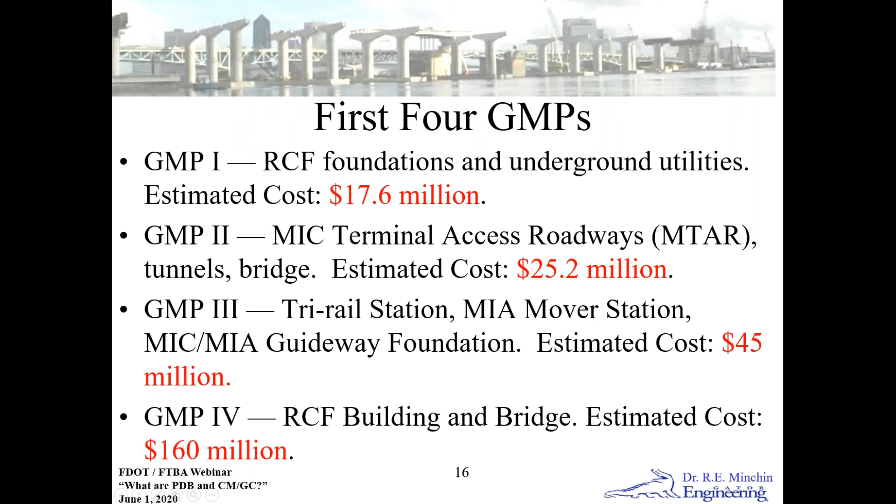And you can look here at these values of these GMPs, and you can note quickly that the first 3 are kind of small compared to the 4th one, and of course they get bigger after that. And we'll get back to that. The next slide. I identified 12 problems with this project, and I'm going to go through each one of them very quickly, given the time. But we have 12 problems. Next slide.

The first one was a decision, and it was the decision for an inexperienced owner, and I do mean inexperienced with CMGC, taking on the largest project in history. So instead of doing the pilot program like we did in the 1990s that I was a part of when I worked with DOT, that we did for design build, to get our feet wet and learn what we were doing, we jumped in and did the biggest project in history for our first project. And I mean, what could go wrong, right? So we made that big mistake and got off on the wrong foot there.

Problem number 2 was GMPs number 1, 2, and 3 were small, as you saw. I pointed those out. The reason that was a problem was that the DOT had made a big deal out of this project, which it was. It is a huge deal, was a huge deal, and was going to bring an incredible boost to the economy in South Florida. Just building the thing, plus all the benefits of having it once it's completed. But they made a big deal out of it in the press and everything.

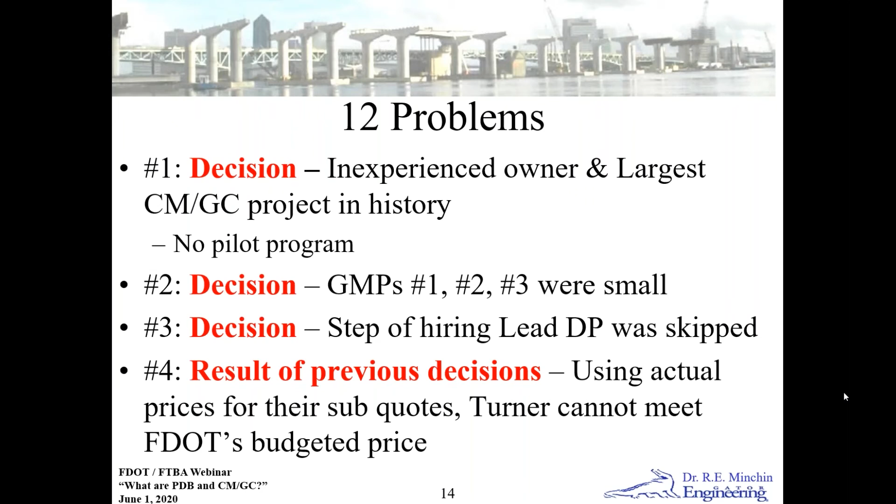The fifth problem was force majeure. It was not anybody's fault that had anything to do with the project. I wouldn't call it an act of God, but we had 9/11. The World Trade Center attacks destroyed the financial model for the project, because the Miami International Airport was a partner in this project, and suddenly they had no income. So it screwed up the financial model.

It also stopped the CM and design professional selection process. I went back and forth about whether one should be problem 4 and 5 and the other should be 5 and 4, but these worked together. 9/11 happened in there, and that's why the design got finished.

And then we look at problem number 6. The geotechnical engineer just kept designing, and so by the time you went to get your CM and get a GMP settled on and agreed to, you had a mess, because 9/11 had happened. The geotech had continued to design, the design was finished, and the CM had no input to the design, and they had no wiggle room, so they just couldn't meet the cost.

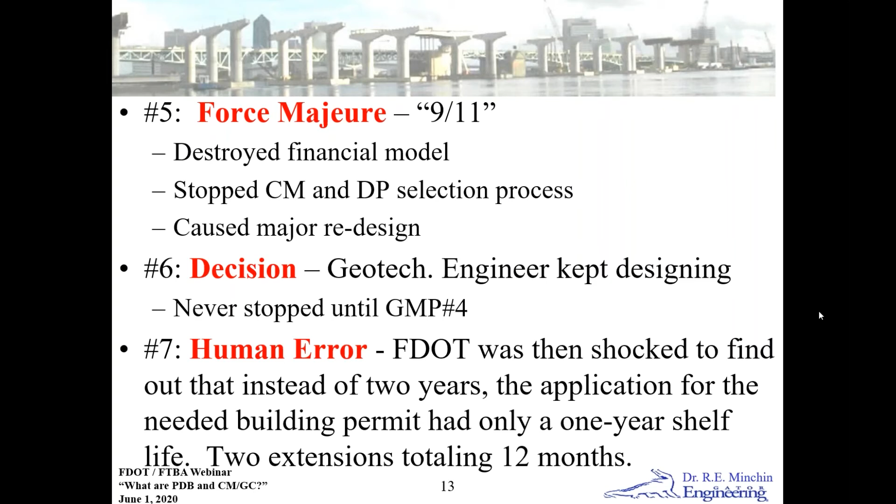And also about the same time, the county was coming along with their new building code, and FDOT was then faced with a tough decision whether to start construction immediately or restart the permit process under the new code. And the decision was made to commence construction, which was a mistake. It would have cost them $200,000 to redesign under the new code.

They went ahead, and we've documented the cost that they faced, not to mention the heartache of going ahead. It ended up costing them 10 times the $200,000 it would have cost them to do the design, by going ahead and starting the construction.

Problem number 9 was that FDOT held firm on their budget, even though Turner showed them the actual cost and showed them real costs here, like Ken said. But the DOT wouldn't budge. And Turner, you told me, went ahead and basically took GMP 1. They agreed to it because they had $1.35 billion ahead of them.

They didn't want to blow it on the 17.6 million. So they went ahead and took GMP number 1 at cost to keep things moving.

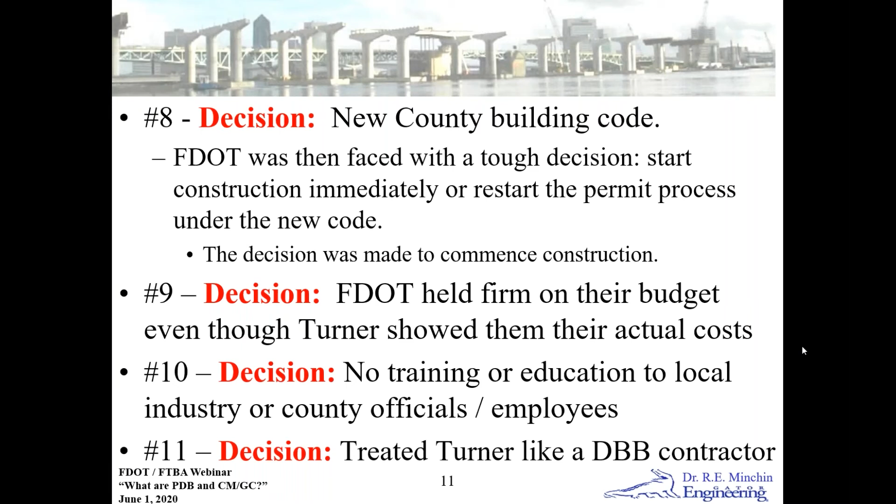Problem number 12 was the coup de grace, the last one. This was their biggest mistake, and it led to a change in the way they did things. GMPs 5 through 8 went great, and you ended up with a fine product. But in these first 3 GMPs, it was 2 instant replays of GMP 1. Basically, Turner's taking them at cost. They're thinking things are going to get better, but the design keeps going, and it keeps staying ahead of construction. So you got the same problem over and over again.

And finally, on GMP 4, it's just more money. It's 160 million, 162 million, whatever it was, and Turner just can't eat it, so they just can't get together. So there's an impasse. They couldn't agree. FDOT relet GMP number 4, as Kat said you can do with progressive design build. They exercised that option and relet it as a lump sum design-bid-build project. Turner was allowed to bid on it because Turner had nothing to do with the design, so you don't have the problem you have with progressive design build there.

Turner was allowed to rebid as one of the 3 bidders on the project, and they bid $370 million, and they were the low bidder. Remember, the engineer's estimate was 160. So it was exactly twice their original offer that was rejected, and they were the low bidder. Well, what happened? You might remember the worldwide steel shortage. China had bought all the steel in the world. The price of steel shot through the roof.

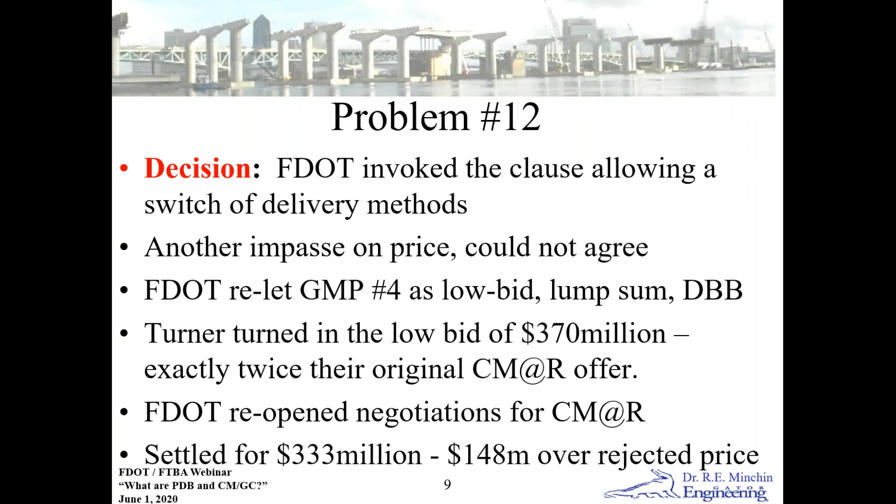And this happened between the time that the DOT finally rejected Turner's last offer of 185 million and the several months later that it took to relet it as a design-bid-build job. And it did take a year before they realized, gosh, we got to reopen negotiation with Turner for the CM at risk. So Turner knocked 10% off and settled for 333 million, which was 148 million over the price that the DOT had rejected earlier. Okay, new slide.

Ken? Okay. So this one is like I told you, my grandfather helped me. You know, we've had a lot of case studies, and Dr. Minchin mentioned Greg Hostert and I were fortunate enough to work on his research team for 2 years, and we had about 5 years worth of case studies, and that's great. But it's hard to go to your leadership and sell case studies, right? Because that's just based on our experience.

Well, now by the grace of God, literally we have data. So when we started 10 years ago, we had no data. We just had case studies, which was very tough to sell to your leadership. Now, based on Dr. Molenaar's research from University of Colorado Boulder, and based on Dr. Minchin's research from University of Florida, we have data, which is huge. So Deming always said, in God we trust, all others bring data. So next slide.

This is just a brag sheet for Ken. When he was doing all this work for CMGC, he caught people's attention. Engineering News Record named him one of the top 25 newsmakers of 2009. They call it the miracle of Osceola, the Osceola County miracle for what he did. And we'd love to spend time telling you all about that, but we just don't have time. But he got a lot of good publicity about that. And Ken is a guru when it comes to CMGC.

Next slide. Thank you, Dr. Minchin. You know, teaching in front of Dr. Minchin, I always say, to quote him, is like talking about the flood in front of Noah. So he's very, very gracious, but he's the one that actually brought us in. And in reality, it was a team's effort. But it shows you the power of a team, and with this method, this is the only method where you can build your own team. And I have to say, Greg Hostert was deputy director, Jason Bolonois was the head of construction. So it took a team, and we even used Turner, which was one of our best CMs. So it really does show the power of a team.

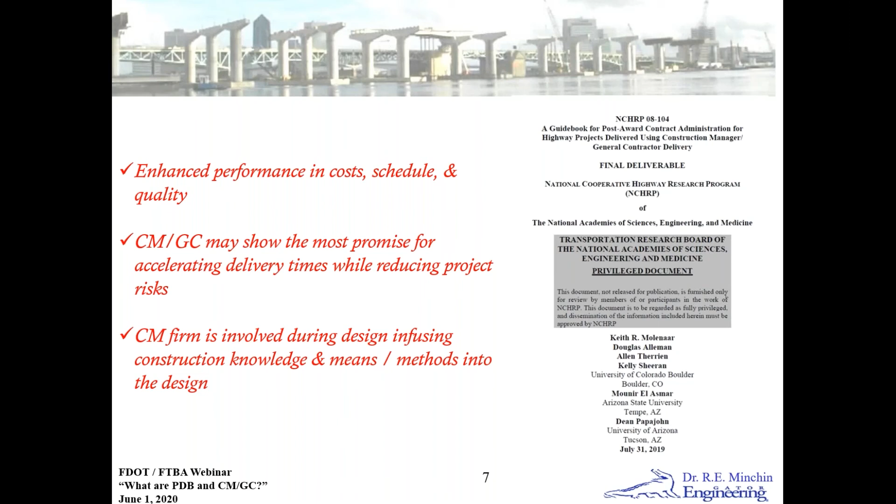This is a slide by Dr. Molenaar, and what it says is really critical to look at is construction cost growth. So if you look at CMGC, you'll notice that the other methods have 4 times the cost growth, which is significant. Remember, we talked about knowing your weapon systems as a leader. We have to understand what this thing is capable of doing, and what it's capable of doing is having the other methods have 4 times the cost growth. So we actually call this a zero change order method.

And really, it shows 0.9%, but in my opinion, the one thing CMGC is really good at is building more scope for the job. So unfortunately, when we built more scope, we got that dollar amount charged against us. So I would say that your cost growth is even less than the 0.9%. It's closer to 0 because we build the most work with this method. But unfortunately, when we added extra work based on saving money, they calculated those savings against us. So you can see the tremendous difference.

And like Deming said, a bad system will beat a good man every time. So if you change the system, the problems will drop out, which is what you see on this graph. So next slide.

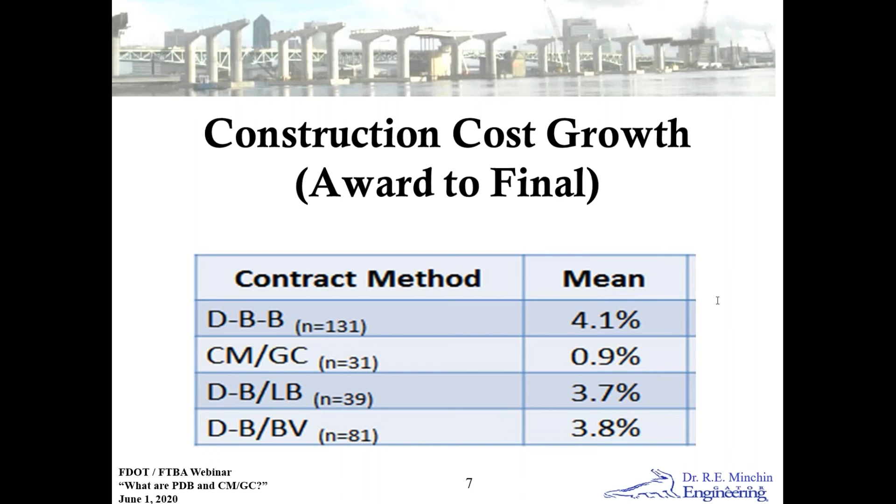Now, one of the things that Dr. Minchin came out with, you always have a PhD statement in one of these. They used to tell you, if you want speed, do not use CMGC. That could not be further from the truth. CMGC can accomplish speed, but it actually gives you the most scope for your job. So not only is it the fastest or one of the fastest methods out there,

because we do not have a handoff between the original designer and the design package. There is no handoff. And usually what we say is when you hand off a design build, you can lose up to 30% efficiency. So the reason we can be faster is we stick with the original designer and we never change. So you never have a handoff, and you save the loss of efficiency. So next slide.

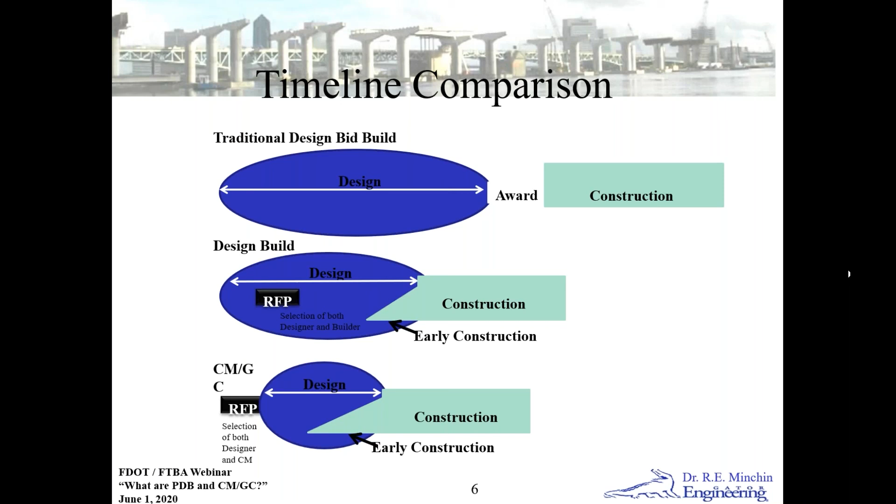And you had it there, and I think we missed it for a second. Yeah. Go forward one more. There we go.

Okay, this is my favorite slide, and Greg would say I could spend an hour on this slide because this is based on the data that Dr. Molenaar came out with. So forget mean costs. That's just the average price of the job, just a sample size. It has nothing to do with what we're talking about. But if you look at mean project duration, that's your design, your construction, your permitting. If you try to add them across, they're not going to add because there are variables in there. I know us engineers like to add across, and it's not going to add together.

And another thing, if you look at design, the average is 904, we're at 281. So why are we so fast? There are many reasons, but one reason is if at all possible, we bring the CM in at the same time as the designer, and we bring the ICE in at the same time, and we design very efficiently. So we're not designing bid sets. The average time in America between 90% plans and breaking ground using low bid is 1 year. We don't have to have bid sets in this method because we're not bidding the job, we're getting pricing as we go. So off the bat, we automatically save 1 year.

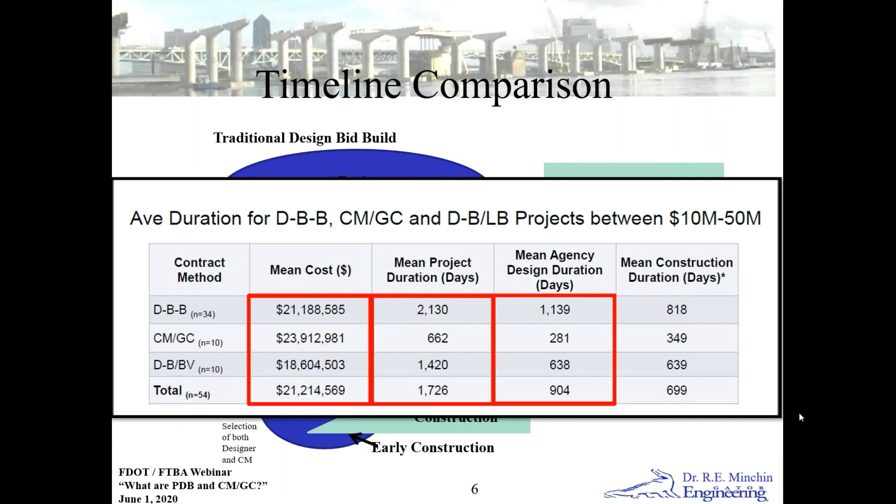Okay, and advance one more.

Thank you. Okay, so this is the percent of projects with major delays. So if you look at CMGC, it's half of design build and it's half of low bid. And really it's less because, like we said, in our opinion, based on University of Florida's research, with CMGC you get more scope for your money. It provides the best value to the owner of any method that we have.

As we were adding scope, we obviously have to add time. So as we save money and we're able to build more scope, they counted that time against us. So I would say that it's actually less than what it shows on here, but even so, you're looking at half of the delays using CMGC versus other methods. Next slide.

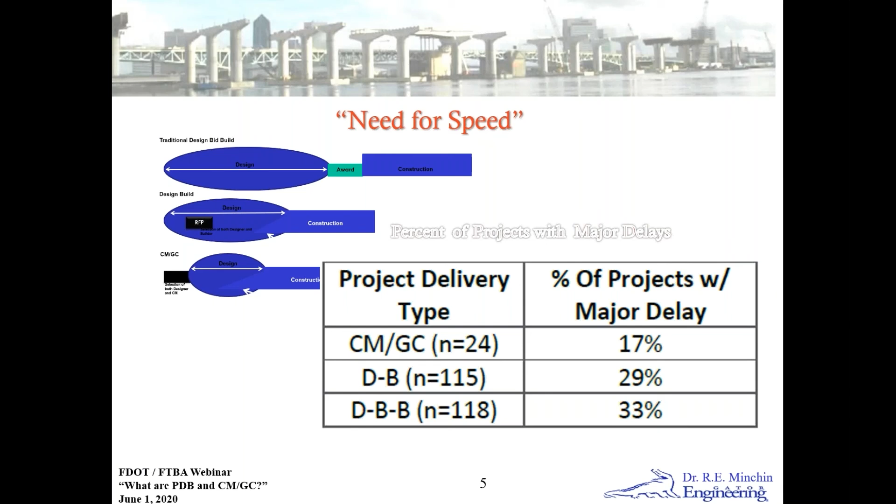Well, this is an interesting slide. I think, Ken, you talked about how two research projects that happened 10 years apart ended up with pretty much the same graph. And we're running short on time, so it just shows the amount of total risk goes down if you do it right. Ken, you want to comment on that?

Yeah, I would add, 10 years ago when we did our research with Dr. Minchin, we created this graph, and this was based on case studies. And we believe that CMGC actually reduced the risk more than any other method. The reason it reduces the risk more than any other method is in low bid, obviously the owner takes the majority of the risk because we prescribe exactly how we want it done in plans and specs.

In design build, we push the risk over to the design build team because we say you have to build it for a price, traditionally low bid price, right? And you have to do it for a schedule. So we're pushing the risk over to the design builder, which costs us two things. It costs us time and money. Whereas CMGC, we're mitigating those risks as a team. We're not allocating them, we're not transferring them, we're trying to get rid of them.

So by far, the most powerful thing about CMGC, second to innovation, is it does the best job actually getting rid of these risks. So 10 years ago, we drew this graph based on our case study. And literally by the grace of God, Molenaar came out with the same graph based on data, which we were thrilled because I was afraid to look at the graph, right? I thought, oh my God, what's going to come out? Well, he came out with the exact same graph, which shows the data backed up everything that we thought in the case studies. So thanks, Dr. Minchin. Next slide.

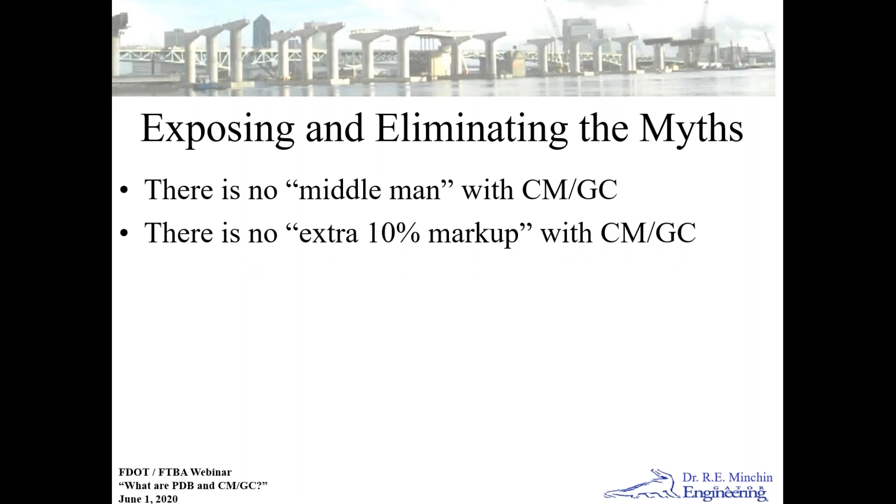We would like to expose and eliminate some myths next. There's no middleman with CMGC. Next. There's no extra 10% markup with CMGC. Next. The myth came from some CM at risk projects 20 years ago that prevented the CM from self-performance. Next. CMGC was developed to do away with this, and CMGC requires self-performance by the CM, so there is no middleman.

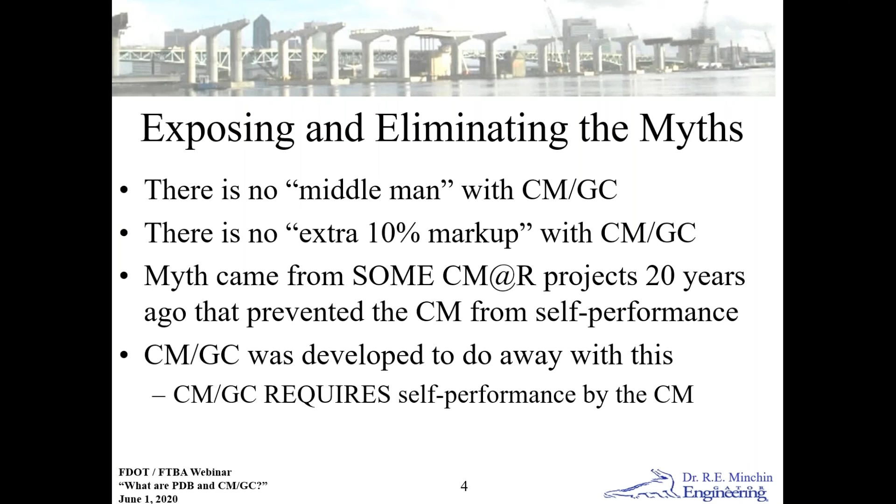Hey, Dr. Minchin and Ken, we gotta hurry up, so we're getting close.

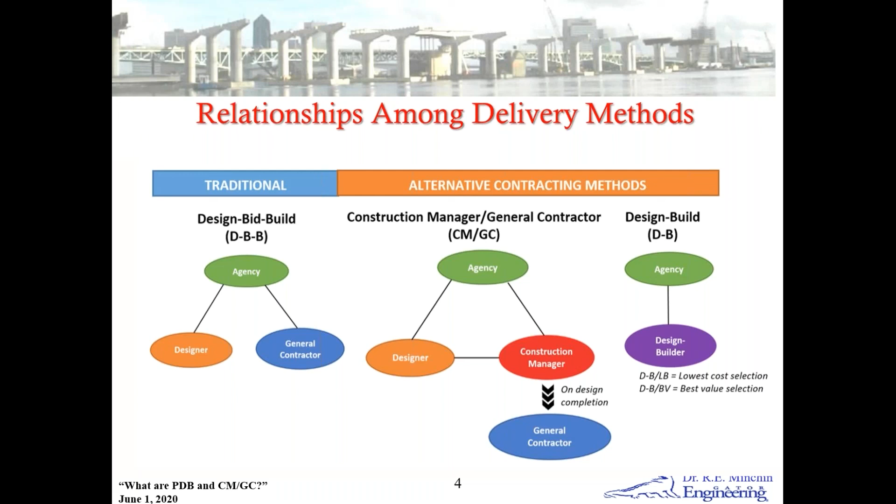Understand. Look at the difference. Look at these comparisons of these org charts, and you'll see that the design bid build and the CMGC are identical, except there's a line between the designer and the contractor, the CM, where there is no contractual relationship. It's just that they work together. Okay, so really, if you're used to design bid build, CMGC is closer to what you're used to than design build. Next.

Love to go through this, don't have time. The two most important ones are the innovation and the reduction and allocation and reallocation of risk.

Ken talked about that already. Constructability, I'm doing a research project on that right now. That's really important too. Love to talk to you about it, but don't have time. Next.

Had the Mountain View Corridor next. Utah DOT job, 15 miles. This is what Ken talked about, the scope increasing, and they charge you with more time and more money in the statistics. But it was a 15-mile project. Ended up being a 17.5-mile project because they saved so much money by innovations and risk allocating and reallocating and reducing the risk that they were able to buy 2.5 miles more of real estate for right of way and pay the contractor to build 2.5 miles of construction.

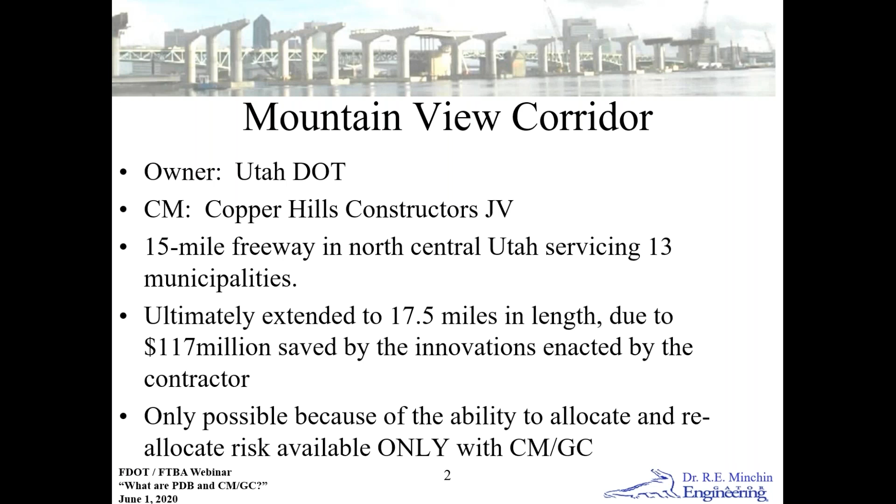Yeah, and I would say, Dr. Minchin, we're finding that across the country with the ones that we're piloting with Federal Highway. Just Caltrans, for example, Ray Tritt's the master of CMGC, one of the top in the country of the DOTs, and just off the bat, a project we helped set up, his team facilitated. The first quarter, they saved $91 million in innovations and risk reduction. So that kind of tells you. So this isn't atypical. This is actually typical. We're finding this across the country for LPAs, cities, counties, tribes, major DOTs, mega projects over 500 million, and also smaller projects. So go ahead, Dr. Minchin.

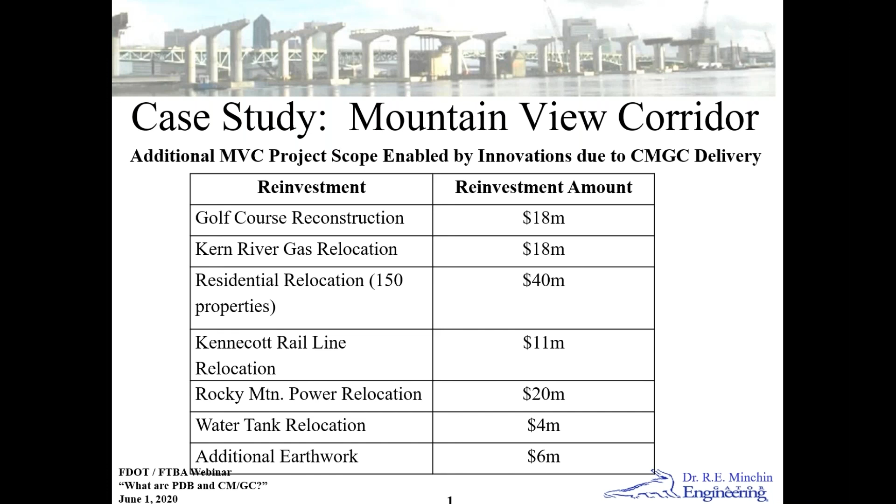People think of George Patton as a guy who went around screaming all the time and motivation, motivation, motivation. But he was a very, very good delegator, and he had a hard, fast rule: never tell people how to do things. Tell them what to do, and they will surprise you with their ingenuity. And that was the key to his success.

And I would say, Dr. Minchin, that's the beauty of this method: we don't tell the team how to do anything. We just tell them what we want. We bring in leaders, and when you bring in leaders to a group, you grow it exponentially. When you bring in managers, you can only flatline and make it run efficiently. But this method is the only method that we can hand select our team and bring in leaders. And that's why our performance is so high, because the military teaches that if you bring in leaders, you grow your organization exponentially. And that's why we get the results on the graphs that we do.

Thank you. Sorry we ran over. It's all good for me. How about you, Nath? Yeah, a couple of questions.

So Ken, Osceola County, who was the CM contractor? Well, you asked a good question. We actually, Nath, had 7 different CMs on that job. So we released 18 different projects simultaneously, and we had 7 different CMs. One was Turner, obviously. One is Junior Davis. We had several different ones. So that shows you the power.